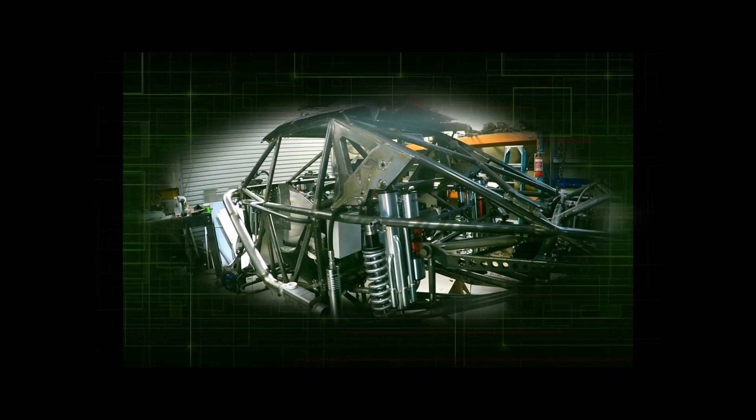Today I just wanted to show you a little bit about BendTech, the software I use to draw the frame on the truck. Just a bit of an overview. I've had a few people ask about the software.

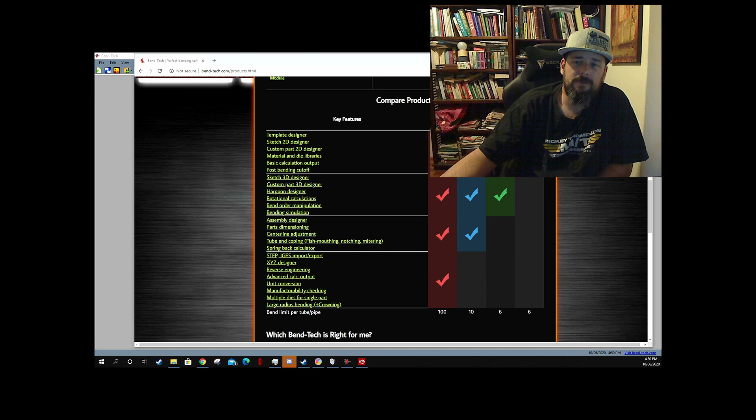If you've got a bender and you plan on making anything half decent, you really need this software, especially if you want to do repeat bends. I can't stress enough how helpful this software really has been.

There's a few different versions of the software, starting down there at EZ, and then you've got EZ3D, Pro, and SE. A lot of it's to do with obviously the capabilities. So you can see down here, if you've got a design which has more than 6 bends in it, you're going to need at least Pro or SE. I started off with Pro actually, and I upgraded to SE.

And the main reason for that was, as good as BendTech is, it is an absolute pain in the ass to use. It is really clunky, but it does give excellent results. So what I did was I designed the whole frame in BendTech, and then I exported it as an IGS file, and you can't do that unless you've got SE.

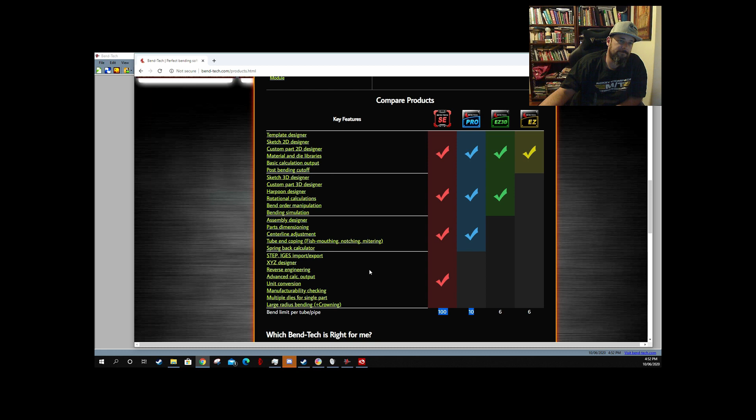Okay, so this is BendTech. When you open it up, basically you have your library down the side. Now, what BendTech really does is it turns your manual bender at home or in your workshop into basically a CNC bender, where you yourself are the servos, and you're doing the steps or the motions of the tube for the bender.

So for all that to work, you need to set up a library, and we have a tube library, a die library, and a machine library, because I've got SE. If you don't have SE, you won't get that option. Obviously, you can set up your spring back.

Those of you that have bent before will know that just because you bend the tube through to 90 degrees on the degree wheel doesn't mean it's going to stay there. As soon as you release the tension off the hydraulics, you're going to get what's called spring back, a few degrees, depending on the material you're using and the thickness of the material. That is why for each material and each die you can set your spring back.

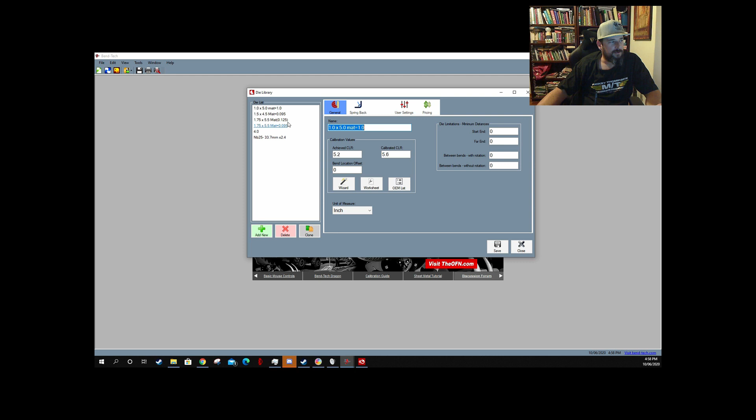Like you can see here, I've got two dies, 1 3/4 dies, same CLR, but the material thickness is different. One is the 0.125 inch and one is the 0.095. And the reason for that is, depending on the material that we're using, that will change the amount of spring back calculated, and so it all has a big effect. It's pretty important to set up the program. The better you set the program out, the better results you're going to have.

So then you've got a tube library. In here you can add in just about anything you want. You know, you can represent parts. So what I've got here, I've got my actual materials that I use when I'm drawing in, and then I've done some outside of the box thinking here, where I've got one here called Coil over, and all these you can set different colors.

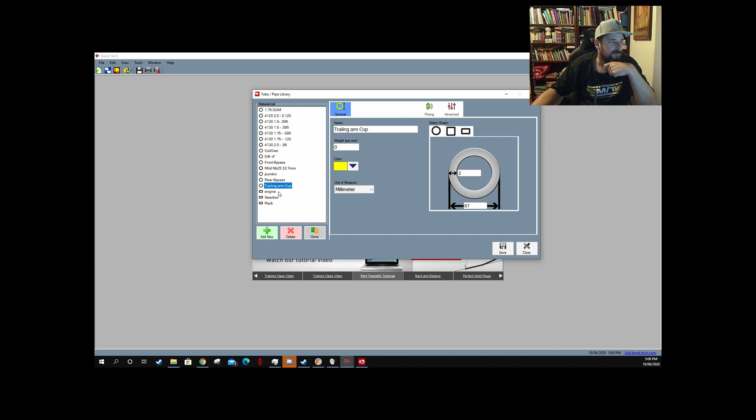You can even set up the weight per inch. Over here you can set your wall thicknesses and your overall diameter. So for a coilover, see I've got it in here as a 3.75 inch diameter. Yeah, and you can see later on why I've done that on one of my models. Like engine, to represent an engine.

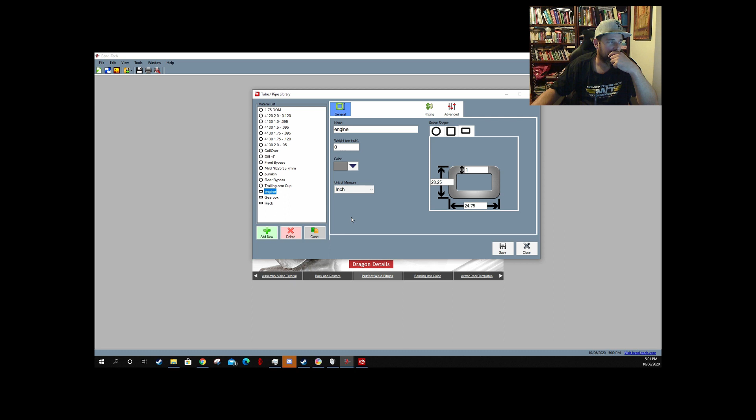So basically all this was before I really was using Fusion 360, and I was trying to get an understanding of the best way I could represent things while I was designing and drawing the frame out. So the best way for me to do that was to draw a block that was 28.25 inches tall by 24.75 inches long. The thickness didn't really matter because all I was worried about is the overall dimension, and that gave me an engine. But yeah, you'll see.

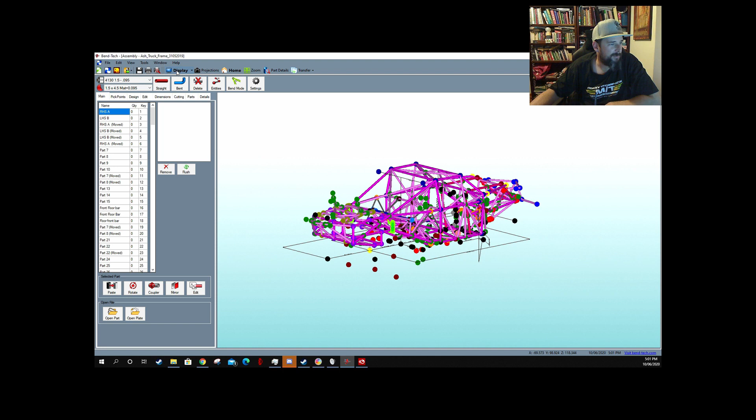So if I bring up one of my files, you can see it gets a bit messy, a bit hard to look at as well. So there's a few things we can do to make it look a bit easier, but you can make it look even worse by clicking here on the display and going to wireframe. So like that, it just looks like a jumbled mess. A lot of tubes, a lot of dots.

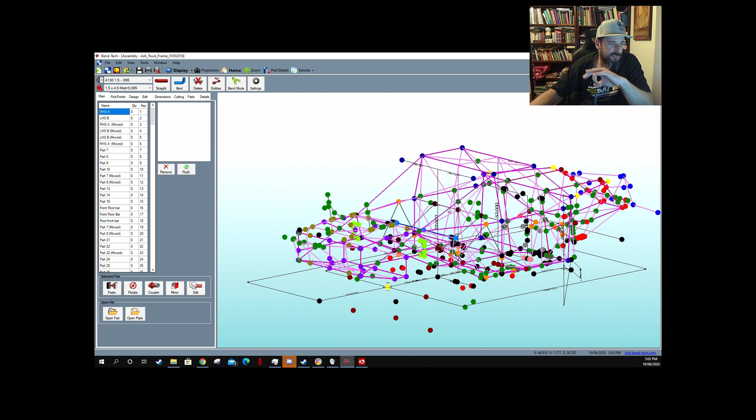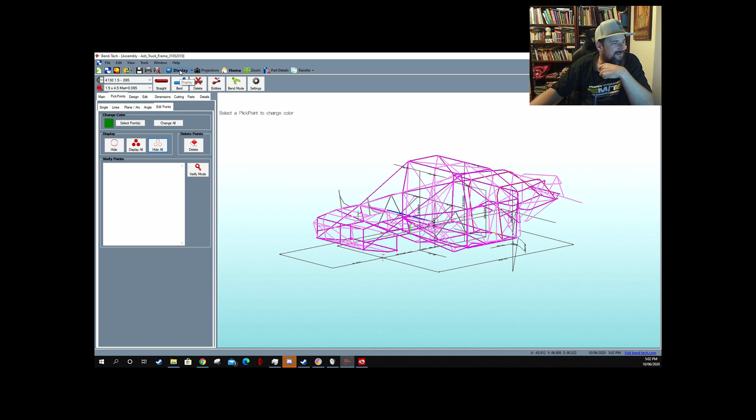So each one of these dots in this program is called a pick point. And a pick point is basically a spot in space referenced from the absolute zero, or from 0, x, y, z. Now you can turn the pick points off. Here we go. There you go. I've also got a few dimensions in there. I've got reference in there for when I was building the frame out.

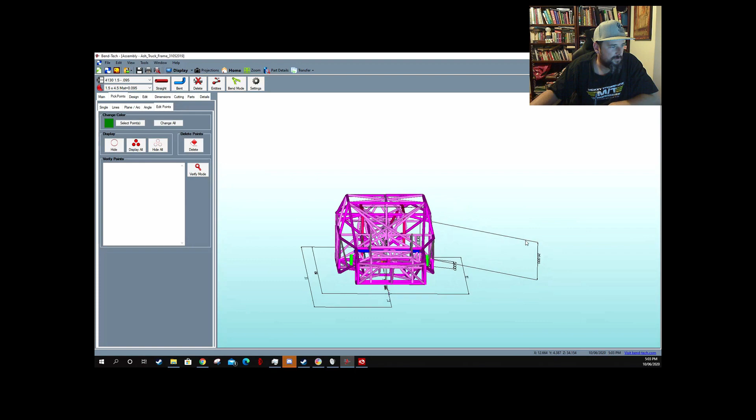Now you can see the different colored tubes, they actually represent different size tubes or different wall thicknesses. So the light pink tubes you'll find are 1.5 inches, and the purple and dark purple are 1.75 inches.

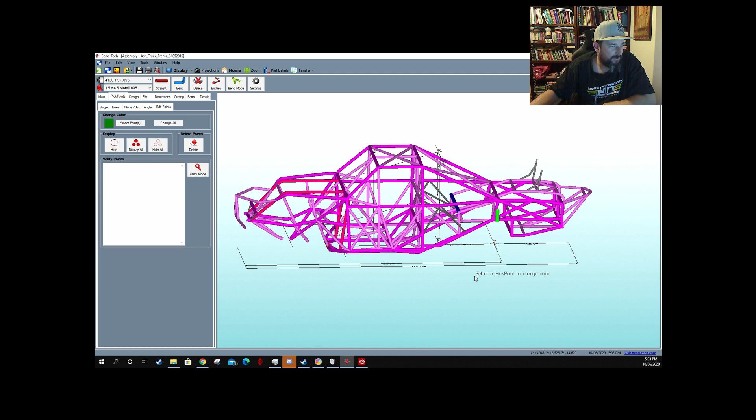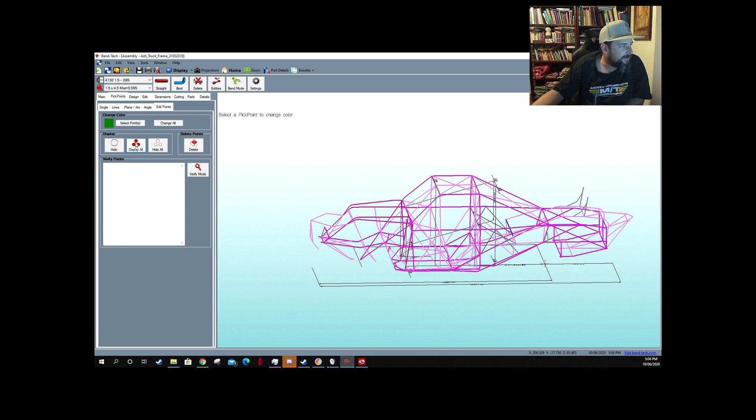Now, to get to something like this takes a very, very long time. It is very complex, and everyone can definitely do this, but it pays to have notes in front of you and a clear mind with no distractions, because you will be looking at it as you're drawing it like this, and you'll be saying, hey, where the gearbox cross member is, and you'll be going, geez, how do I get in there?

And you'll be like going in here, and you'll be like, oh yeah, down in here, I'm gonna draw in a new brace, a new gearbox brace. How I'd do that is, if I wanted to draw a new gearbox brace from this point to this point over here, right?

First of all, I come up here and I select my material or the tube that I want to put in there. So maybe, for instance sake, we're going to put a 1-inch tube in, okay? And because this is just a straight tube, we're going to say we want to put a straight one in, and it automatically goes to our wireframe.

And it's as simple as letting it highlight where the pick point is, right? And we say we want to start here and finish here, okay? And that's it. There's that tube. It's just put that tube in. If we go back to display, you can see there's the tube.

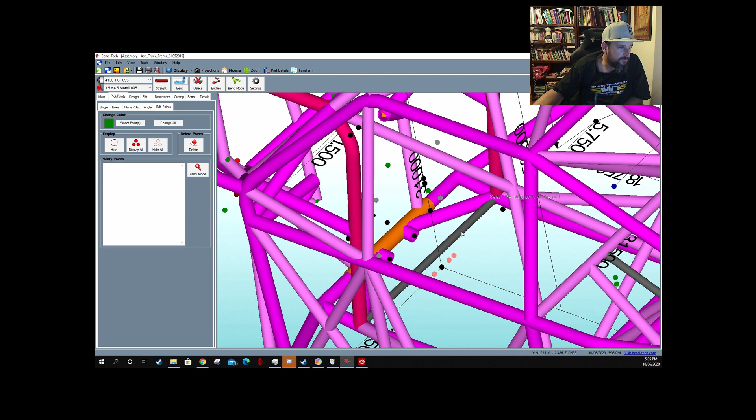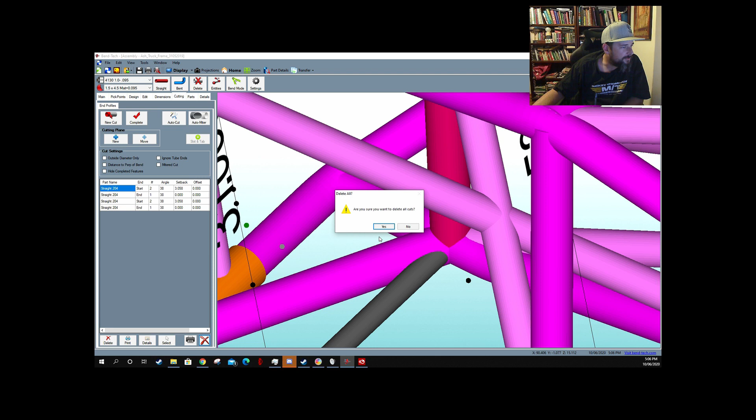Now, although it looks like it's nicely notched into this junction, it's actually not at this point. You've got to manually do that. So every tube, every junction point, if we want to look at this tube that we've just put in here, we come up over here to cutting, right? And I will just clear all this cutting that I've got sitting in there. So we want to do a new cut.

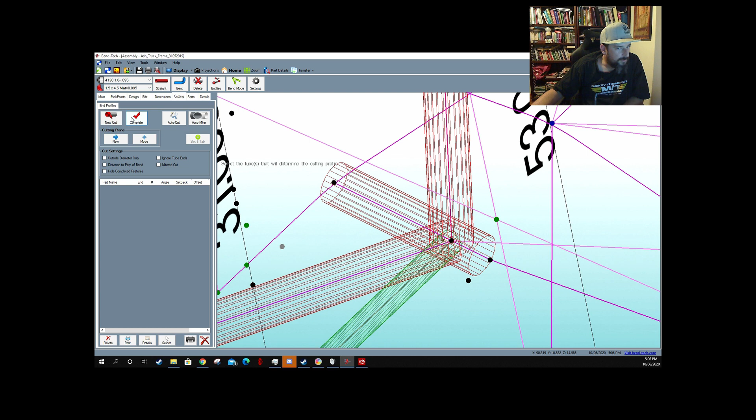Click that, new, and we highlight the tube, and look, it comes up with a little note saying select the feature you wish to cut. So this is the tube. We want to cut this tube. We click it, and it goes green. And we want to cut this tube to this tube, and this tube. Right? And you see how they're all red. Then we come over here and we say complete, and you can see it's given us the notch.

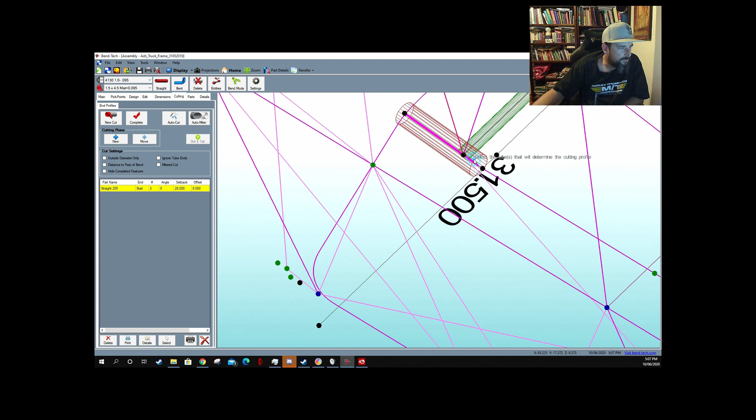It's notched it, right? And then we'll say we want to do a new cut, and we come to the other side of the tube. I'm going to go this tube, on this tube, and this tube. Complete. And it's notched that one, right?

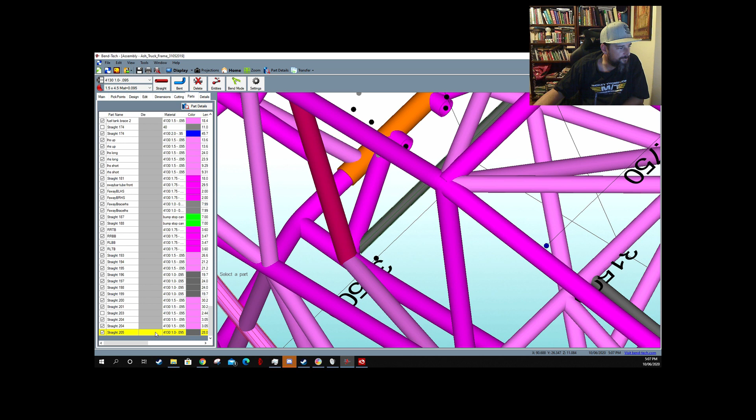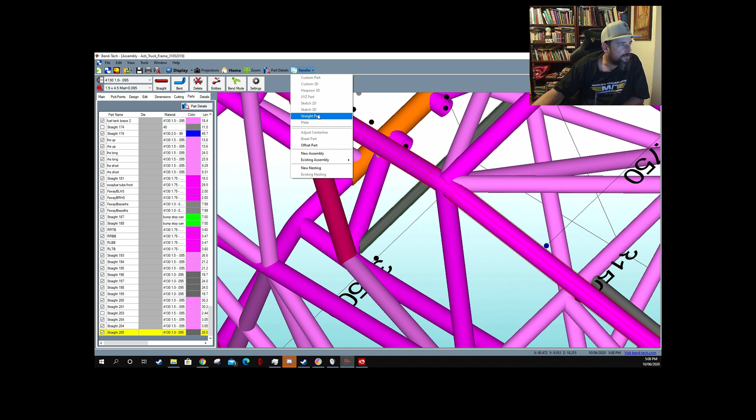Then what we can do is select parts, because every tube is a part. So we can select this part, which is this one here, and it comes up over here. It's this straight tube, right? From there we can come over to transfer, and we can look at this straight part. Or we can look at part details. Part details is what we want.

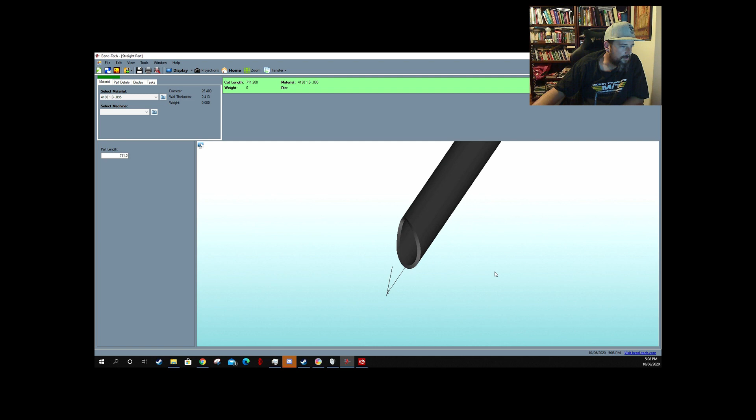And you can see we've pulled that tube out of the assembly. This is the tube there, and you can rotate the view around, and you can see down here we've got our nice little notches on the end. Okay. Now we can also see that up here it's got a cut length of 711.2 millimeters. I know it's millimeters because before I started this video I set up millimeters.

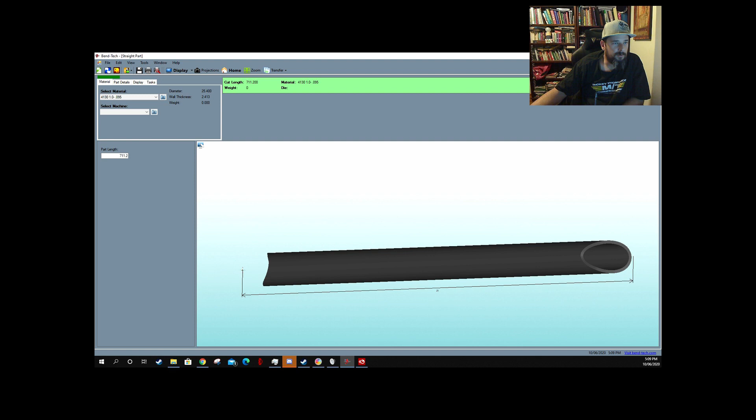So what this cut length means is you can go and get your piece of pipe and cut it at exactly 711.2 millimeters, and once you've done that, you'll print out. So if I just minimize this and go back to our assembly and go back to cutting. So these are the two cuts for that tube we're looking at, okay? And if I show you what happens if we click on details,

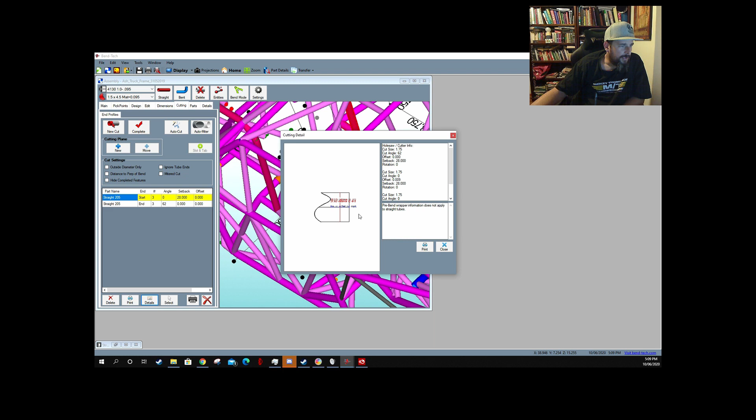this is the wrap that you can print out. Oh, there you go. So this is the wrap, and basically you'll put this on your tube. You'll wrap it around. You'll line up your red line, and when you cut it out, this will exactly meet this line here. So you'll tape it onto the end of your tube, and this red line here, you will measure from the end. It will be 24.189 millimeters to the end. That's the end of the tube.

Okay. At the other end of the tube, over here somewhere, you'll print out your other wrap, and you'll tape that onto your tube, and that will also have a distance to the end, and it will be talking about the end that it's at over here, or it will have this measurement here, which is the distance to the second.

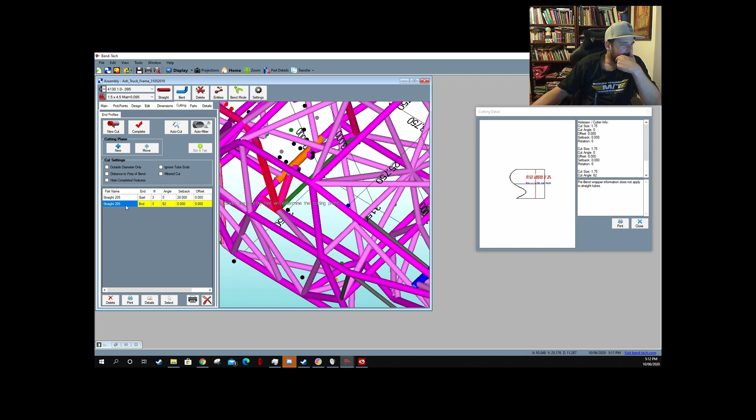And I might be telling you porkies. It's been a while since I've done one of these. That just does not seem right. That seems small enough to be measured from this end. Let me just check to see if we are actually in millimeters. Oh no, see here the unit measurement, so we are in millimeters. Alright. So we open up the, oh there you go.

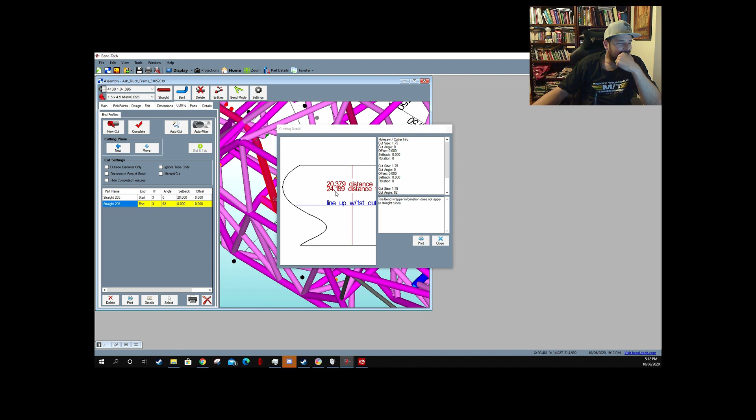Well, on these straight ones, I actually don't know what that means. Usually, the distance to the end is from this line to the end of the cut pipe, the pipe that you cut. And you slide this on, you line that up with that distance, and then this blue line obviously

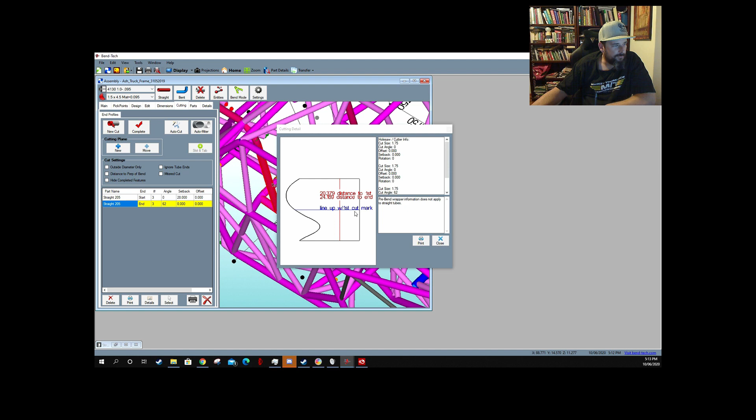lines up. Where it says lines up with the first mark, it's talking about on your other wrap, lining this wrap up, this blue line with the other line, and that way you'll have your orientation right. But yeah, not a great example.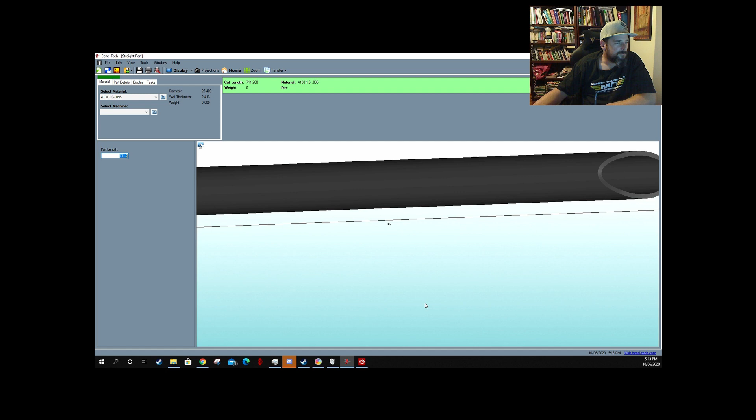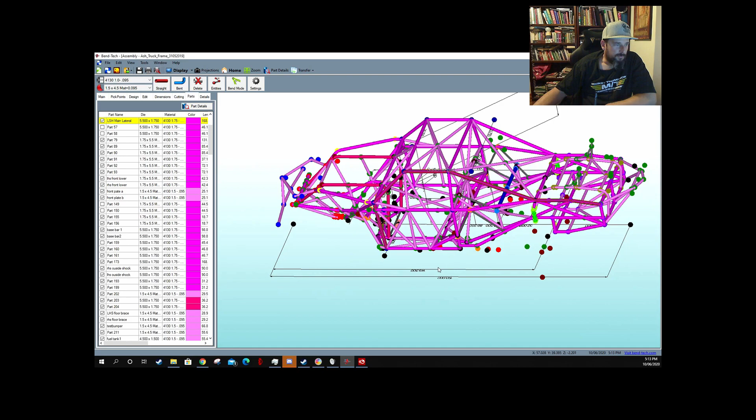Alright, let's do this. No, I don't want to save that part. So, for instance, let's have a look at this part here. The other thing is you can just go on parts and you can pull a hole. So on my truck, this is one of the hardest parts to bend. It's got 2 compound bends in it, and that's the main lateral bar.

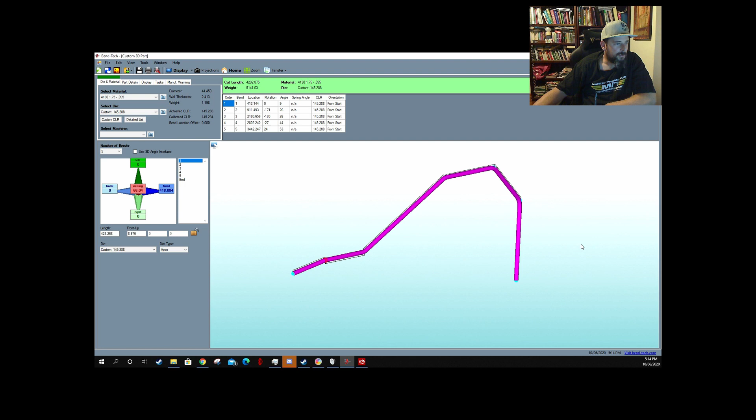So if we pull this part out and we have a look at it, so that's it there. Okay. Now on the main lateral bar, that's all one piece from the front of the truck to the back of the truck. Now you can see up here we need a cut length of 4,292.8 millimeters. Okay, so that is based on a straight piece of pipe. So you go and cut a straight piece of pipe, that exact length there, and you lay it down.

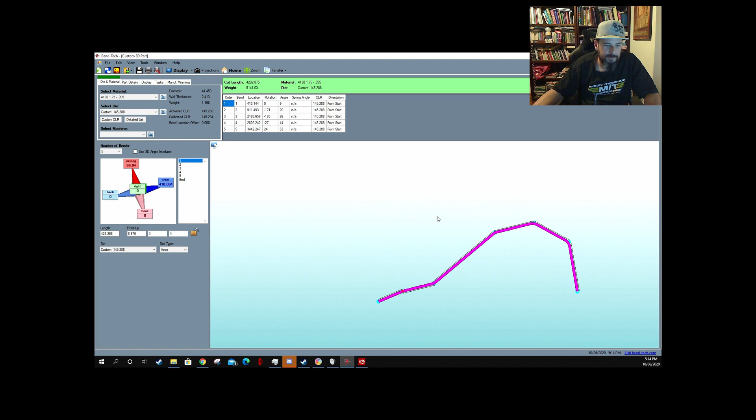And then what happens is you mark one end of the pipe start, and you mark the other end of the pipe end or finish. Okay, and then you read this section here, and you look at the order, and the order is step 1: 412.1 millimeters in from the start, which is the start end of your pipe that you've labeled. You put a mark, and that mark will symbolize bend 1.

911 mil in from the start, you put another mark, and that's bend 2. And you go through this all the way till you get to 3.442.247 millimeters in from the start. You put your last mark, and that's going to be bend 5.

Okay, and what happens is you then go and load your tube into your bender, and if you're like me and you've got one with compound bends, when you set it up in your bender, you'll also have to set up, and you should do this anyway, just to maintain your bends on the right plane. You should set up an angle finder, preferably a digital one, on the back side of the tube,

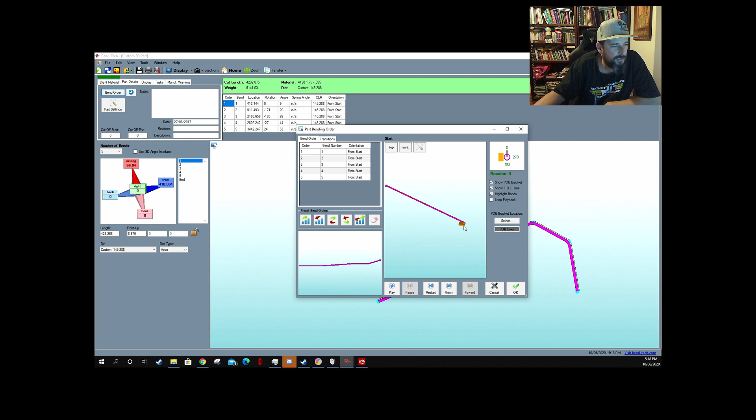So right here, this represents the die. See if we can make this. Oh, there you go. So this represents the die. Okay. And these are our bends. So we've got 5 bends to do. 1, 2, 3, 4, 5. And we can just click play.

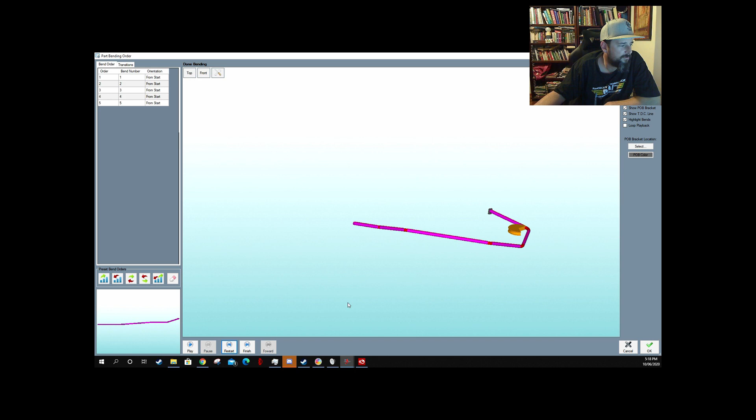And you can see that's how it's planning to play out with the current bend order. Now, for some reason, if we just go back to that second last bend there, all that bit's all right. It's that one there. Is it that one? Yeah. See this one here, it's coming down. This is heading down towards the floor. So depending on what height you've got this at, you might find that because this is now bending down, that's going to hit the floor, and that's not going to work for you.

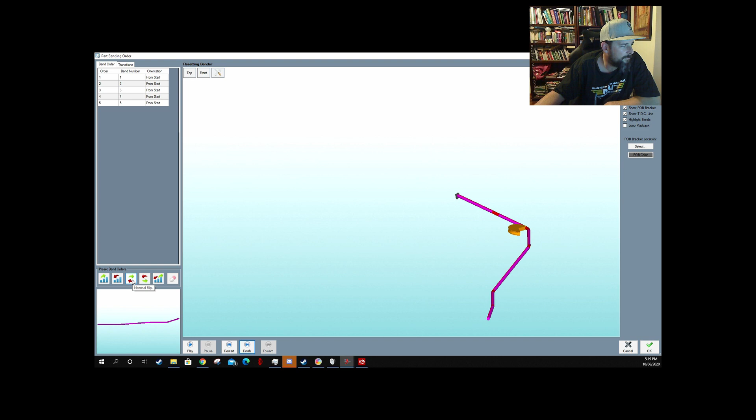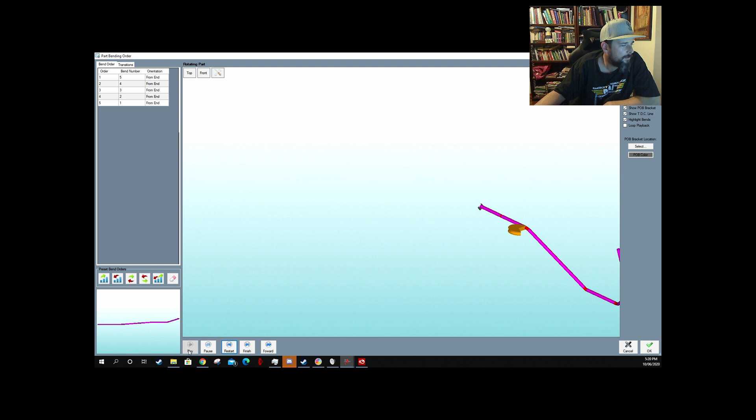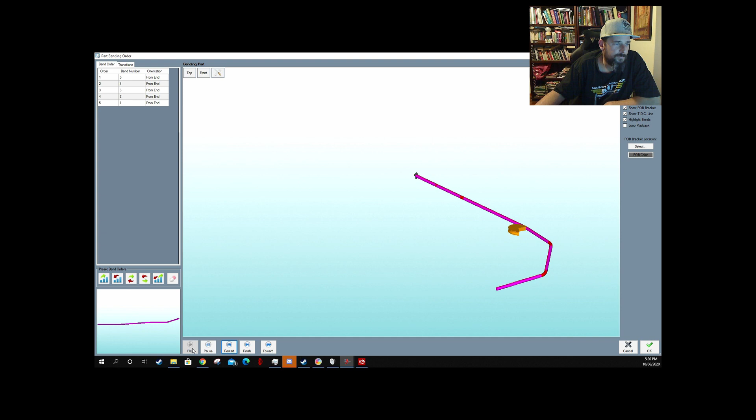So what you can do is you can flip the... We can reverse. So these options here allow you to flip or reverse the bending order, and it will change it back on your main page. And see, now with it in reverse, all of our bends are up high in the air. So you just need to play with that a little bit to work out. It's a good little tool. Up here in the corner you can also see the rotation. But yeah, so that's that.

Now the other thing you can do is add some grip. We've got cut off at the start, so I know that for my particular bender, I need like 170 mil. Oh, hang on a sec. And I'm back. Sorry about that.

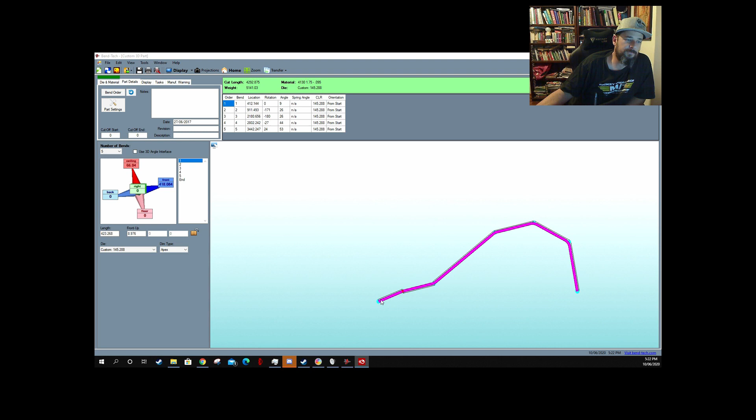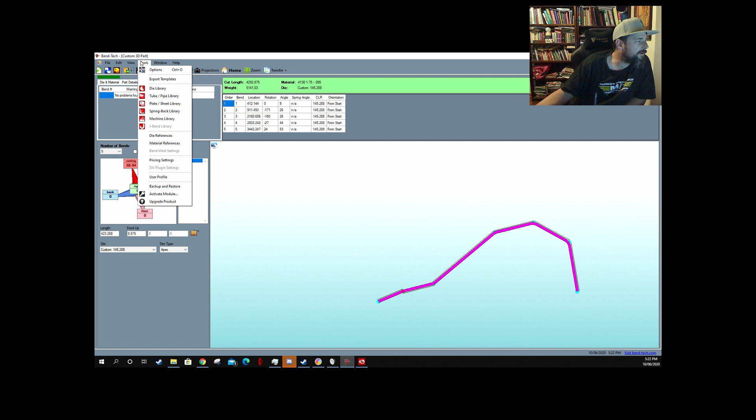Yeah, so sometimes if you've got a bend right near the end of your tube, depending on your bender, for mine, I know I need something like 170 odd. Actually, I think I might even have it in. You can set up warnings, manufacturing warnings, and I'm pretty sure I have done that before. Basically, if you don't have enough green on the end and you go to bend, your tube can pull through the follower die, and that can be a world of hurt, and obviously you won't finish your bend. So when you come across those sorts of situations, in here it's really easy to do.

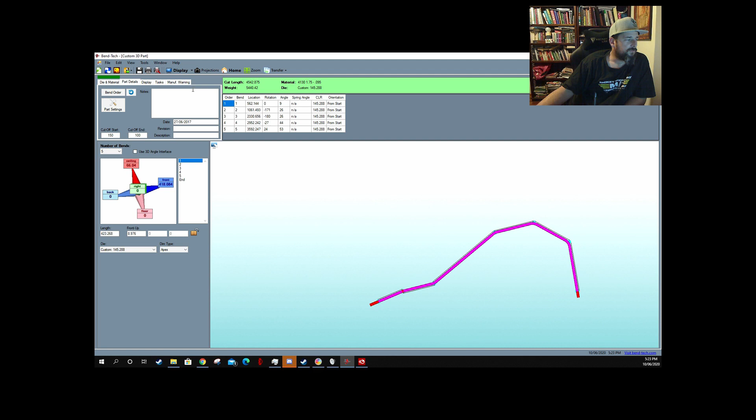You can go, hey, let's throw on an extra 150 mil of green on the end, or maybe you needed to put it on the other end. You can put 100 mil on that end, and you can see right in here we've got that red showing up, and you would have also seen that now our cut length has extended that additional 250 mil. So you can set it up like I was saying, manufacturing warnings. So if you've got a bend near this end, let me see if I can find one, because I'm pretty sure I've got it set up.

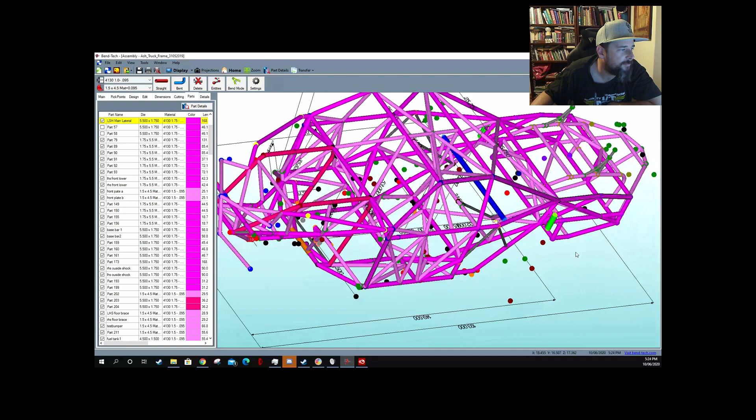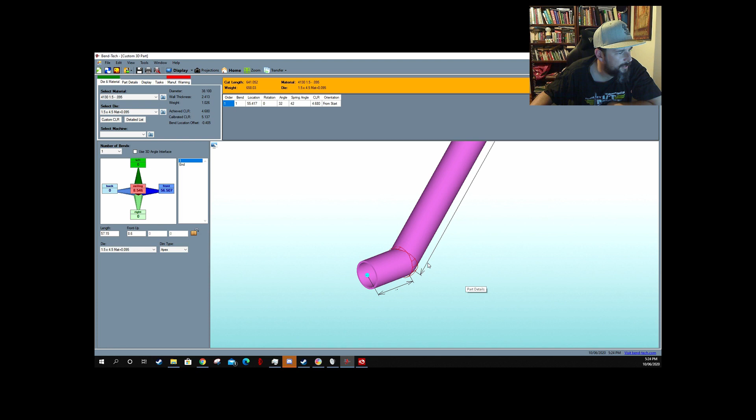So for instance, you'd be surprised, you know, the last thing you want to be doing is bending, and then all of a sudden you go, oh shit, it doesn't work. You know what, that there, that looks like it might have an issue. So let's have a look. Got a bend right on the end. See how we've got a bend right on the end? So see how we're orange up here, there we go, I was right. So we're orange, and then manufacturing warning, and we've got this red. And I've got here bend 1 too short to start.

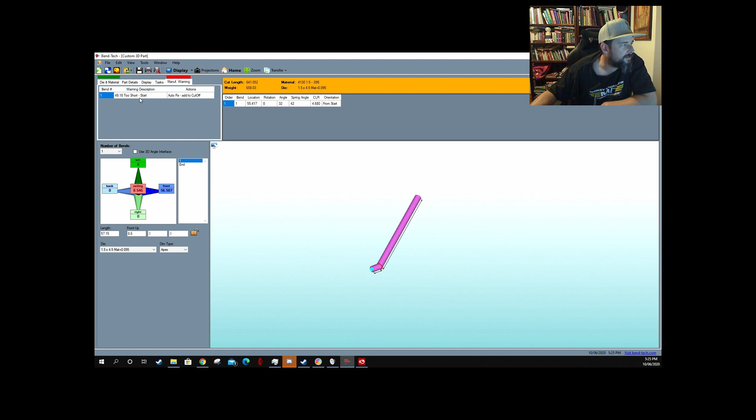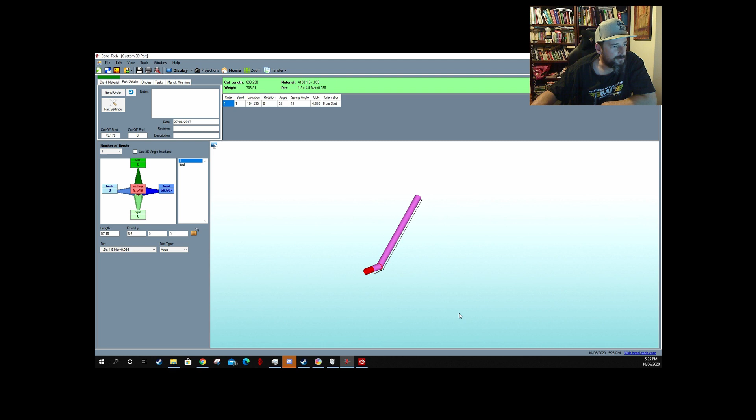Okay. And basically, not sure if it's auto fixed it. There you go, auto fix. Boom, it's added some green on there. What has it added? It's added 49 mil, and now we're green to go. So on your first bend, you need to clamp your tube, you see. So that 49 mil, that's about the width of the clamp. So that's probably where that came from. But these are all things you'll pick up, you know. This is a bit more advanced.

Because BendTech's really good for minimizing your wastage on your tubes and your materials, it's really handy to have this. So obviously, once you've done the bend, you'll have to cut that 49mm off, but you know you're going to be doing that. But it's really handy that it's identified that you're going to have a problem before we even go and start. So yeah, that's about all for today. Bit of a BendTech overview.